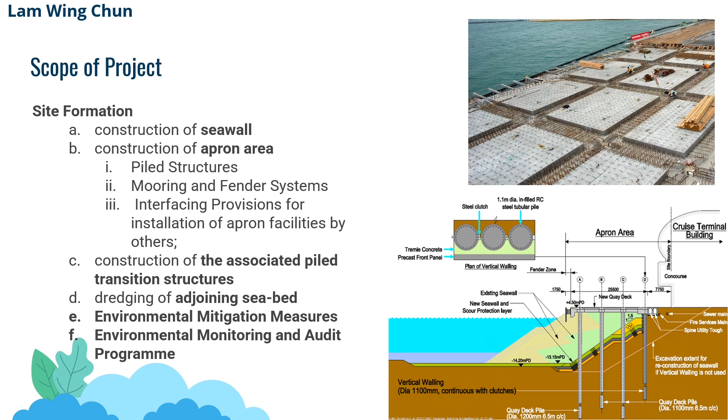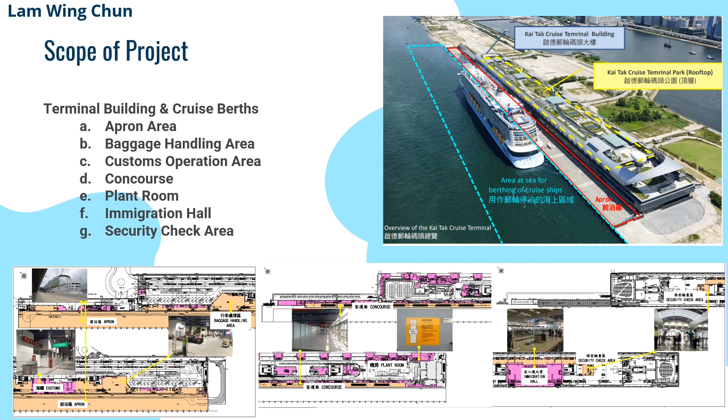After site formation, the terminal building and cruise berth cover the sea area for berthing of cruise ships, apron area, the cruise terminal building, and terminal park. Inside the cruise terminal building, there are various building works such as baggage handling area, customs operation area, and concourse.

The ancillary facilities mainly refer to the green area and recreational facilities, which include the arrival plaza, arrival alleé, and northwest terrace, etc.

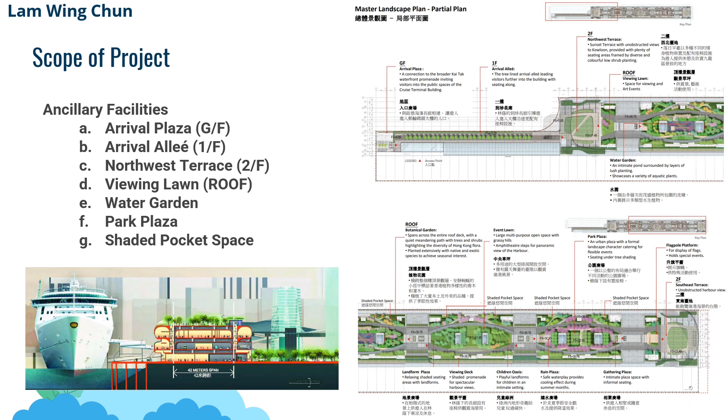After introducing the scope of the project, the timeline overview of the Kai Tak Cruise Terminal started from site formation in November 2009, construction of the terminal building and ancillary facilities in May 2010, completion of berth 1 and terminal building in June 2013, and completion of berth 2 in September 2014.

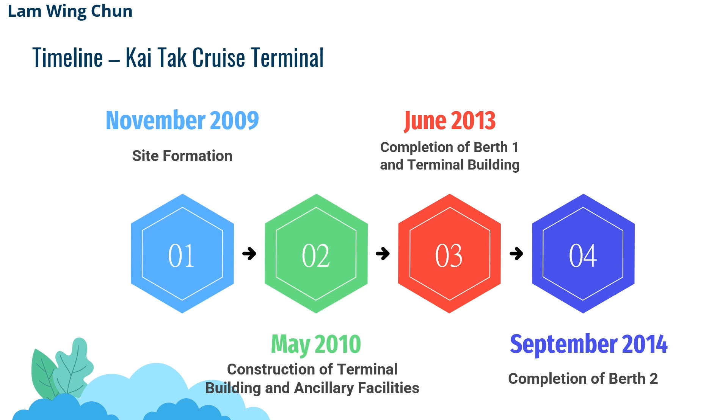For the site formation, the project is initiated by the Tourism Commission as client and assigned to the Civil Engineering and Development Department as project managers, with POC Company Limited as contractor. The representative of the engineer is assigned to URS and Scott Wilson Limited, while the environmental works are assigned to Lam Environmental Services Limited as team leader and ERM HK Limited as independent checker.

For the division of works, Foster and Partners played the role of lead architect, Wong Tung and Partners will be responsible for architectural design, and AECOM will be responsible for structural design, landscape design, as well as building services design.

For the project objectives, the short-term goals include the provision of cruise vacation services to attract mainland visitors, the alleviation of container terminal pressures in ocean terminal, and the creation of new employment opportunities.

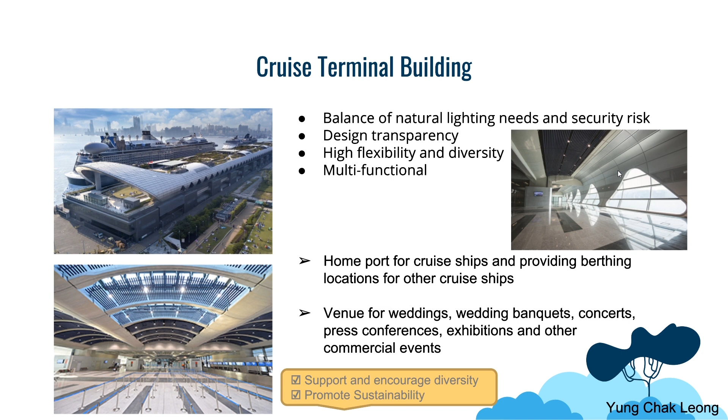It shows that it supports and encourages diversity and promotes sustainability. Hence, there are some problems in the project.

First of all, before the outbreak of the epidemic, the operation, performance, and management of the Kai Tak Cruise Terminal had not been very satisfactory. The terminal was like a dead city on weekdays, with sparse crowds, and restaurants and merchants operating with difficulties. Since its closure in 2020, the shops have been left empty until now.

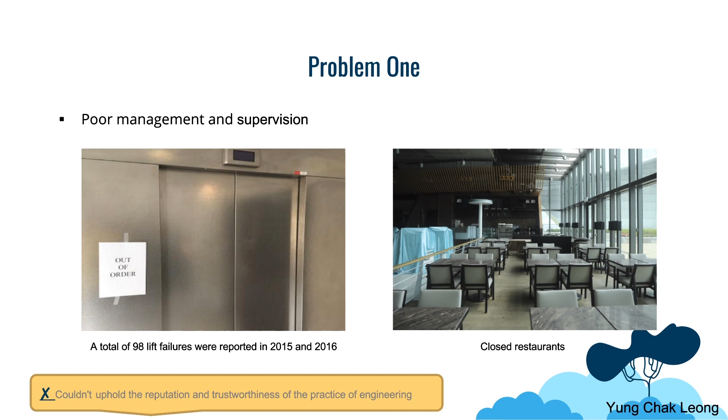Many restaurants and shops inside the terminal have been closed for a long time, and there was even an accident of unpaid wages and food delays earlier, with many lift failures reported in 2015 and 2016. This shows that it can't uphold the reputation and trustworthiness of the practice of engineering, since it shouldn't let too many accidents occur.

Problem 2 is the inadequate transportation facilities. On public holidays and when the cruise ships are berthed, the number of taxis cannot absorb the large number of passengers who have just landed, and there are long queues at the taxi stand. So the transportation facilities pose difficulties to the operation, and it might not be sustainable in the off-season.

In the past, some shop owners contacted the transport departments to discuss improving the transportation, but they didn't follow up in the end. So the poor transportation facilities are the main reason for the low utilization rate of the pier. This shows that the project team has failed to respond to the community.

Problem 3. The shore power facilities of the cruise terminal had been reserved for future installation before the terminal was designed, and will be implemented as promised in the process just in 2013. This will help reduce health risk to nearby residents when the cruise ship is berthed.

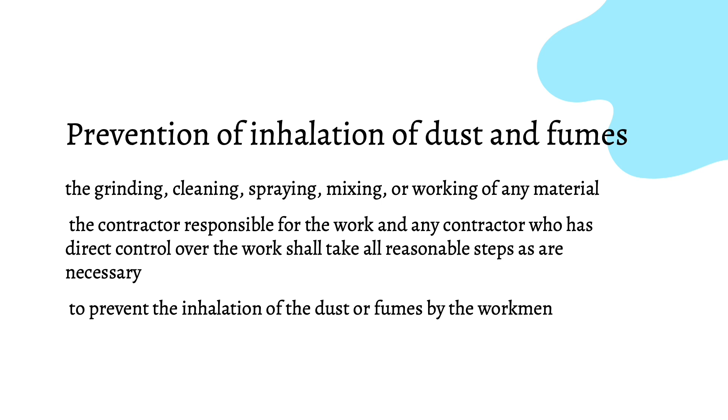Here is some guideline suggested by the OSH Council to guide the workplace.

The Construction Site Safety Regulation Part 7 states the following regarding dusty working: the contractor responsible for any construction site where any process is carried on which results in particles or materials or dust being produced in such a manner as to be likely to enter or damage the eye of any workman engaged in the process, and any contractor who has direct control of the process, shall ensure that suitable goggles or effective screens are provided for protection of the workman, and that the workman uses the goggles or screen as the case may be. We can see that the OSH ordinance has changed simple meaning words like dusty workings into specific legal terms, which requires us to obey the law and ensure workers are safe in dusty environments. Thank you, that concludes the legal, health and safety dimension.

I am Hong and I am responsible for the environmental dimension. I would like to talk about the impacts of construction. First, it causes air pollution. When there are construction activities, there is a need to excavate and transport soil, and transport vehicles need to deliver construction materials, emitting a lot of exhaust gas. Therefore, it causes air pollution.

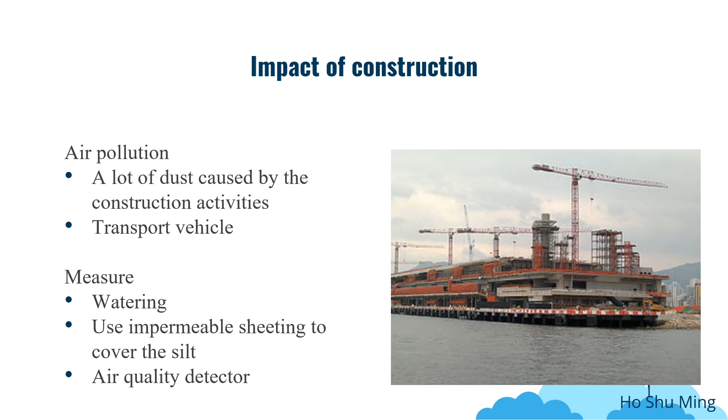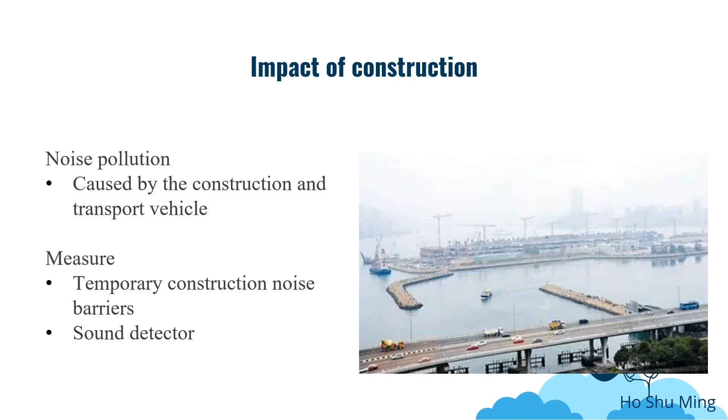Construction also causes noise pollution. It is inevitable for construction to produce a lot of noise, which affects nearby residents and schools. Therefore, temporary construction noise barriers are set up to reduce the noise, and sound detectors monitor the sound. If it exceeds the dB limitation, measures are taken to reduce the construction noise.

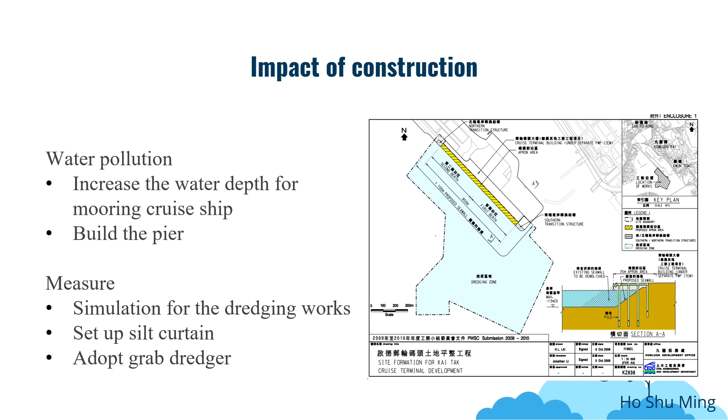Construction also causes water pollution, since the original water depth is not suitable for cruise ship docking, so dredging is needed to remove sediments and increase the water depth. There is also a need to build piers for the pickup and drop-off of passengers. These constructions cause water pollution and damage the marine environment. Therefore, before construction, simulations are done for the dredging work to simulate the effects and outcomes. There is also a silt curtain set up, and a grab dredger adopted, to prevent silt from extending outside the harbor.

Now I would like to talk about the impacts of daily operation. First, air pollution is aggravated since cruise ships use sulfur oil and emit a lot of exhaust gas, increasing PM2.5 significantly. The highest measured PM2.5 is 38 micrograms per cubic meter, and the average is 26 micrograms per cubic meter. This is higher than the WHO recommended safety standard of 25 micrograms per cubic meter, showing it is harmful and smelly. Therefore, the government has established legislation limiting cruise ships to using no more than 0.5% sulfur oil when docking.

After this legislation, PM2.5 reduced by around 20% to 30%. There is also another possible measure, which is installing shore power at the Kai Tak Cruise Terminal for the cruise ships. This can reduce cruise ships burning sulfur oil to generate electricity for passengers' use, reducing air pollution.

There is also noise pollution, mainly caused by the cruise ship, which affects residents and schools. Also, the quality of water in Victoria Harbour is affected by the cruise ship, damaging the harbour environment and causing some fish to die.

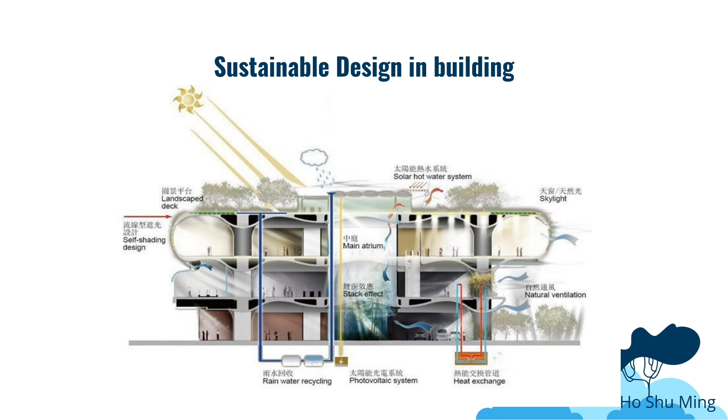Next I would like to talk about the sustainable design of the Kai Tak Cruise Terminal. First, it has a district cooling system, which can reduce electrical power use by around 20 to 30%, and is convenient for remodeling, with no need to change too much for the system. It also uses solar panels and photovoltaic panels for renewable energy. Moreover, it uses daylighting designs in the building to reduce power use, and this kind of design reduces energy consumption.

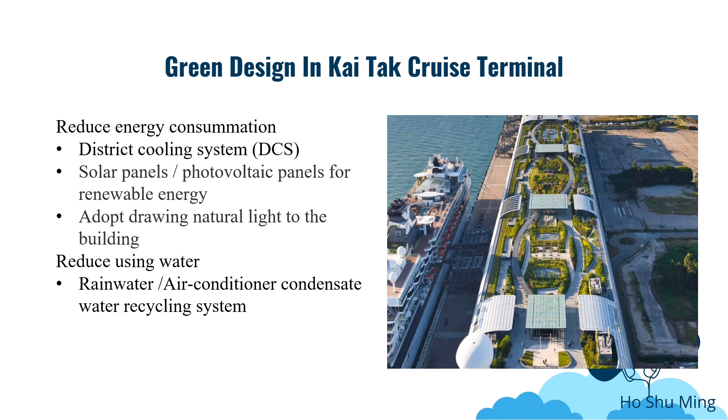There is also a rainwater and air conditioner condensate water recycling system, which reduces the use of water for watering plants. Currently, this is the first building to achieve the highest certification level for new buildings, BEAM Plus Final Platinum, indicating that the Kai Tak Cruise Terminal has done a good job designing a green building. This is the end of our presentation. Thank you.